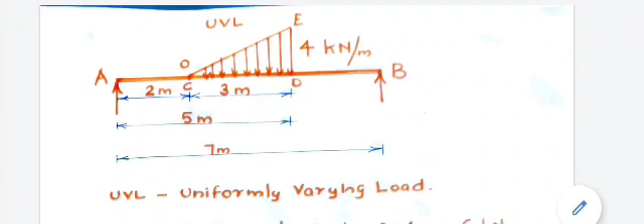Next topic is uniformly varying load. So a load whose magnitude will be 0 at one point and that will be linearly increasing to a particular magnitude at another end. Such a load we call uniformly varying load.

In this figure, a beam AB is simply supported at A and B. C and D are two points on this simply supported beam, and the distance between C and D is 3 meters. On CD, a uniformly varying load has 0 value at C end and 4 kilonewton per meter at end D. So in between, the load is varying linearly.

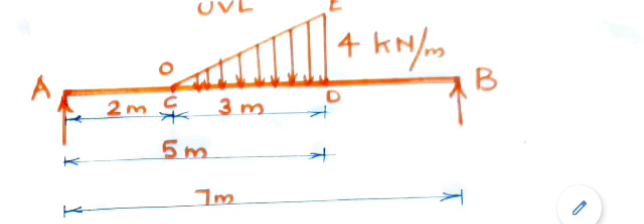Okay, so half into 3 into 4 will give you the area of this triangle CDE. And this will be equal to half into 3 into 4, that is 3 into 2, and that will be 6.

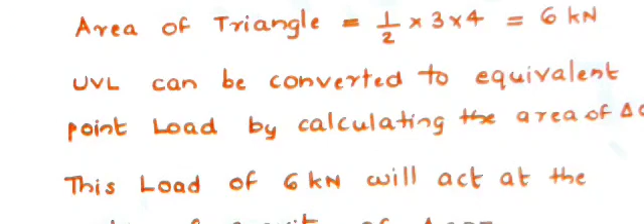In order to convert UVL to equivalent point load, we have to calculate the area of this triangle. So that will be half into CD into DE, that is half into 3 into 4, which is equal to 6 kilonewton.

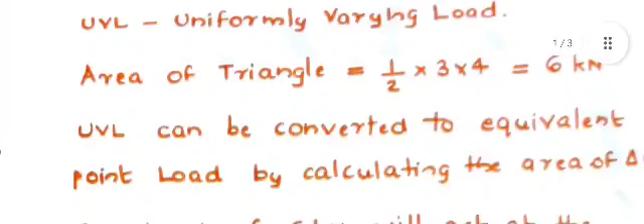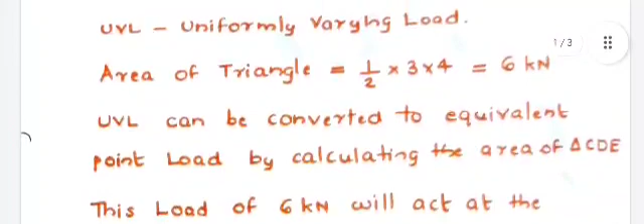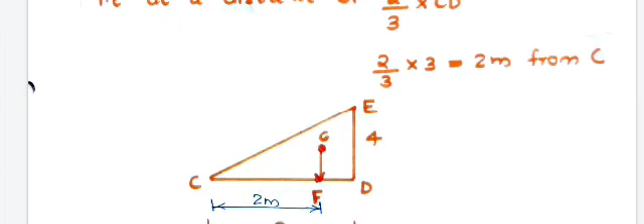Now the UVL will be acting at the center of gravity of the triangle CDE. So the center of gravity of CDE will be at a distance of 2/3 of CD from point C. That is 2 by 3 into CD, and CD distance is 3 meter. So 2 by 3 into 3, you will get it as 2 meter from C.

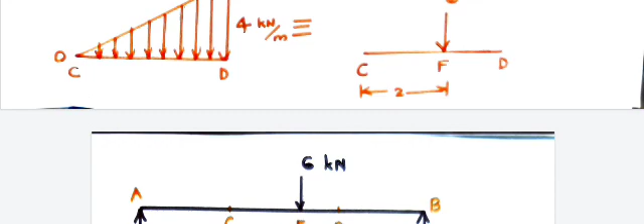To 4 kilonewton per meter at point D, and that can be converted into a point load of magnitude equal to the area of this triangle, which is half into CD into DE, which is half into 3 into 4, that is 6 kilonewton, and that will be acting at a distance of 2 by 3 of CD. 2 by 3 into CD is 3, that is 2 by 3 into 3, that is 2 meter from point C.

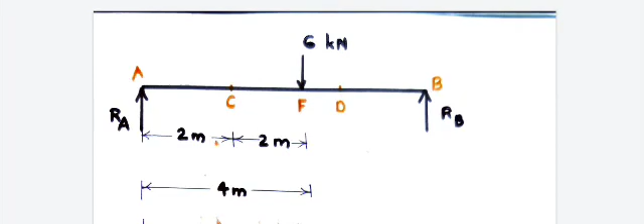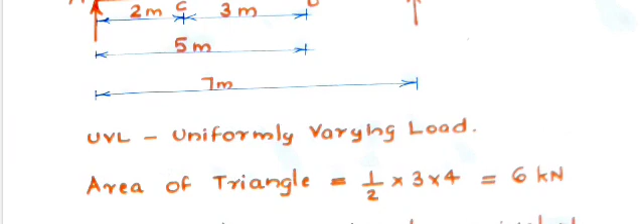Okay, so in the free body diagram, mark DB as 2 meter. Then AB distance is 7 meter. Okay, so this is your free body diagram.

Now the beam which is simply supported will be in equilibrium under the action of these forces. So since it is in equilibrium, the resultant will be equal to 0. The conditions of equilibrium are: first, algebraic sum of the forces along the horizontal or x-axis will be 0.

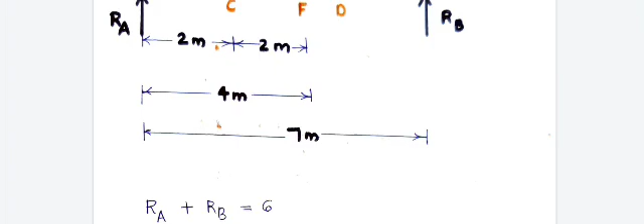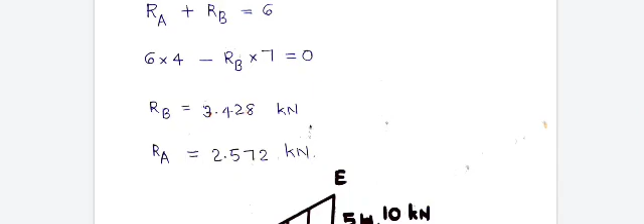The equation will be minus RB into 7. So the total equation for moment will be 6 into 4 minus RB into 7 equal to 0. Solving these two equations, you will get RB equal to 3.428 kilonewton and RA equal to 2.572 kilonewton.

Second question: a beam AB of total span 5 meter is simply supported at A and B. A UVL of magnitude 0 at end C and 5 kilonewton per meter at D is acting over the span CD, which is of distance 3 meter. Another point load of magnitude 10 kilonewton is acting at F, that is at a distance of 4.5 meter from the end A. The total span of the simply supported beam AB is 5 meters.

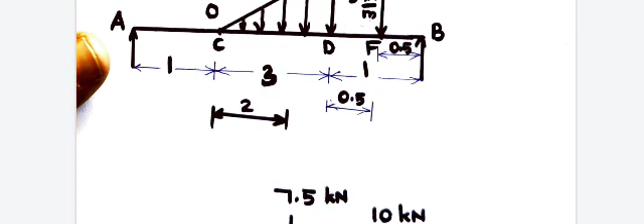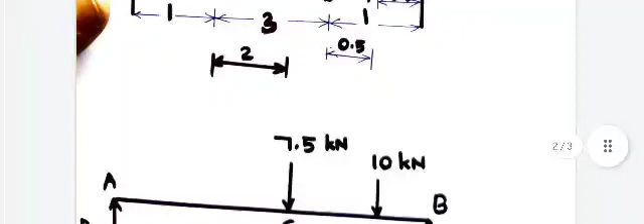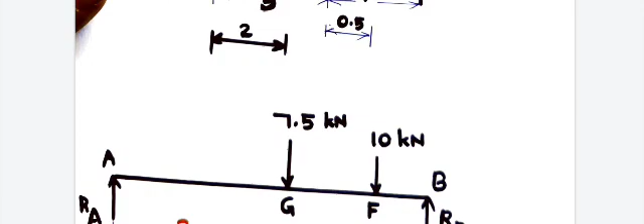And that will be acting at a distance of 2/3 of CD from C. So 2/3 into 3 from C, so 2 meter from C. We will give that point the name G. So at point G, that is at a distance of 2 meter from C. AC distance is 1 meter. So total AG distance is 2 plus 1, that is 3 meters. So at 3 meters, 7.5 kilonewton is acting.

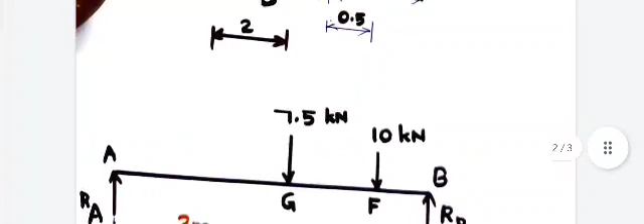Then at a distance of 4.5 meter from A, a point load of 10 kilonewton is acting.

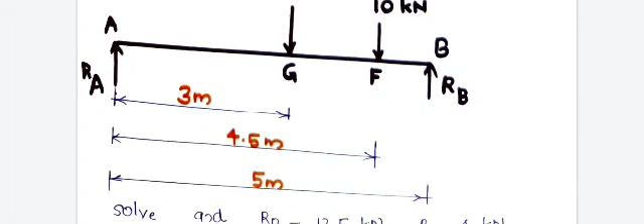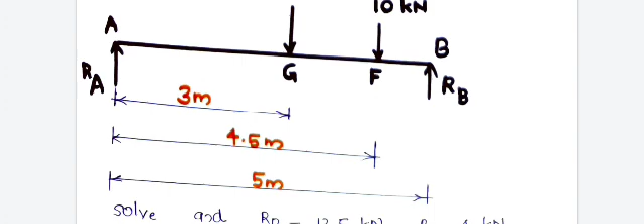7.5 into 3 plus 10 into 4.5 minus RB into 5 equal to 0. Solving these two equations, you will get RA equal to 4 kilonewton and RB equal to 13.5 kilonewton.

So next, the third question. A simply supported beam AB of span 10 meter is simply supported at A and B. A UVL of magnitude 0 at E end and 5 kilonewton per meter at end B is acting over the span EB, which is equal to 3 meters.

A point load of 10 kilonewton is acting at C and AC distance is 1 meter. Another point load of magnitude 15 kilonewton is acting at D and CD distance is 3 meters. Given that the distance DE is 3 meter and EB is also 3 meter.

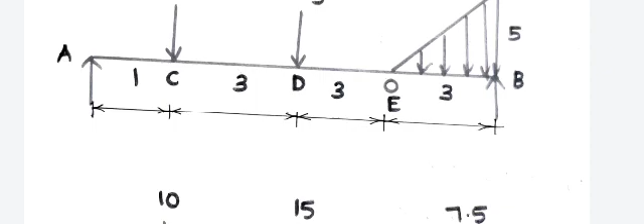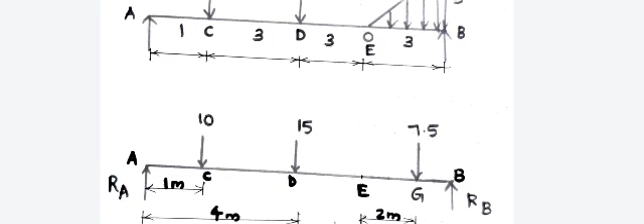So convert the UVL into equivalent point load, which is equal to half into base into height, that is half into 3 into 5, that is 7.5 kilonewton, and that will be acting at 2 by 3 times the distance EB from point E. So 2 by 3 into 3, that will be 2 meter.

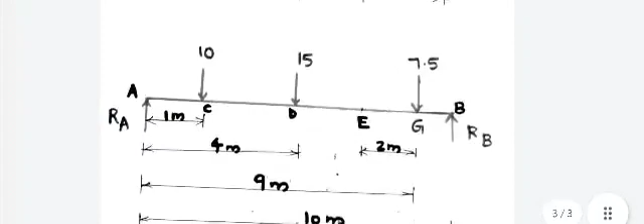We'll give the point of application the name G. So 7.5 kilonewton is acting at G and EG distance is 2 meter. So this will be the free body diagram.

From this again we know that the beam is in equilibrium, therefore algebraic sum of the forces along the x-axis will be 0. Here there are no horizontal forces. Then algebraic sum of the forces along the vertical will be 0. Here also, the forces acting upwards we take as positive, and downwards we take as negative. So the equation will be RA plus RB minus 10 minus 15 minus 7.5 equal to 0.

Taking moment about A, we get 10 into 1 plus 15 into 4 plus 7.5 into 9 minus RB into 10 equal to 0. Solve and find out the values of RA and RB. Okay, thank you.